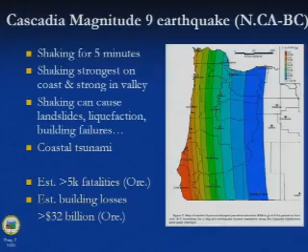So in our study, we estimated that there would be over 5,000 fatalities in Oregon alone. So it doesn't count Washington State and British Columbia and Northern California, and that the amount of losses from building damage would be on the order of over $30 billion.

Now, why are we concerned about weak buildings? Because when weak buildings collapse, it can actually kill a lot of people. In 1994, we had a very important building code change where the building code requires seismic design in the construction of new buildings. Before 1994, the seismic codes were absent, and therefore some of the older buildings in our state are actually dangerous and weak and subject to collapse. So lawmakers in 2001 passed laws that require schools, regardless of the age, and emergency facilities like police stations, hospitals, and fire stations to be seismically life-safe.

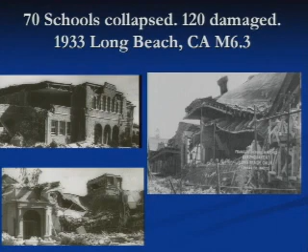Now we passed these important laws based on information from other earthquakes, including from experience in California. In 1933, there was a Long Beach earthquake. That earthquake caused 70 schools to collapse, and there were also over 100 schools that were damaged. So in 1933, actually, California passed laws that say school buildings need to be seismically safe.

So knowing that we have a lot of older buildings, what can we do about them? I'm going to present some information about the seismic risk management program that the Oregon University System has. They have over 1,000 buildings, and they are slowly getting the more important buildings fixed.

We got $5 million of FEMA grants to DOGAMI and worked with the Oregon University System, and we strengthened 5 buildings on 4 of their campuses. These buildings include various construction types, including URMs, or unreinforced masonry buildings, as well as concrete and steel buildings, and they have successfully implemented a risk management program starting in 2005.

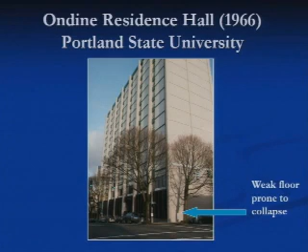So I'm going to show you quickly these buildings. This is a dorm building, a residence hall at Portland State. It was built in 1966, and the first floor is actually a weak floor and prone to collapse. So if your first floor collapses, everything above it is at risk.

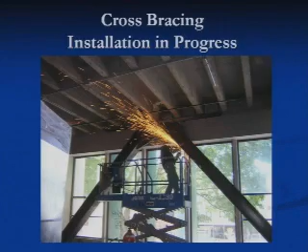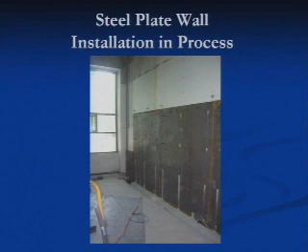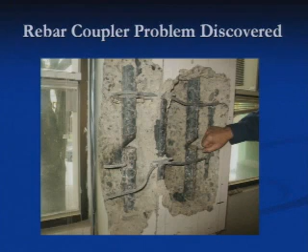We took a look at the rebar. The rebar wasn't welded together, so what we did is we had those welded together, and the building is much better off and won't collapse in a major earthquake.

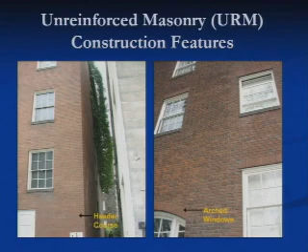This is another building at Portland State. It's an unreinforced masonry building. It has the classic features of an unreinforced masonry building with the arch windows, and also a header course where the bricks are turned sideways. And what we did there is we replaced the roof so the roof was a sound structure, and we tied the walls to the roof so that the walls wouldn't fall out.

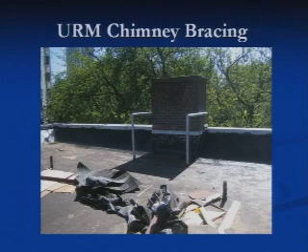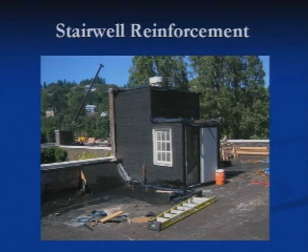We also tied the features on top of the roof. We anchored them down so they wouldn't fall down on the sidewalk and hurt people passing by. So here's the chimney getting braced, as well as the parapet getting braced. We wanted to make sure that the stairwells were solid and there for people to get out of the building, so we strengthened the stairwells as well.

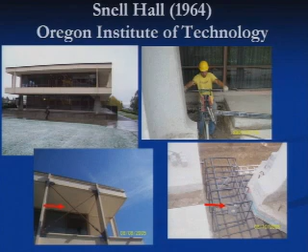Here's a third building. It's a steel building down in Klamath Falls. What we had to do there is actually improve the foundation all the way up to the roof. So you can see the foundation work going on, as well as adding cross-bracing rods up on the second floor.

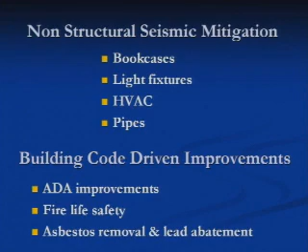And in this case, we also did non-structural seismic mitigation, where we tied the bookcases so that they wouldn't fall down, as well as the light fixtures so the overhead lights don't fall down, as well as securing the heating, ventilation, air conditioning system and piping, and also did a number of code improvements dealing with ADA improvements and fire life safety, asbestos, and lead abatement.

Now, the fourth building we fixed is at Oregon State University. It's what we call a lift slab building, and the floor slabs are not connected well to the columns, and they can actually collapse down pancake style so that there's very little space between the floors, a big life safety concern.

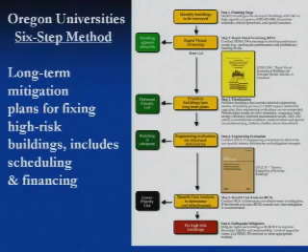So the Oregon University system has a 6-step method where they looked at the major buildings using a rapid visual screening method, prioritized those buildings with respect to other needs that they have, whether it's energy efficiency or deferred maintenance, then did engineering analyses. If it looks like it needs to be fixed, then a cost-benefit analysis before fixing it to make sure that the money is spent very wisely.

They have a lot of buildings and they can't fix everything at once, so they have a long-term mitigation plan for fixing the highest risk buildings, and they integrate the financing and scheduling into that. So it's not possible to fix all of the high-risk buildings at once. It's really a balancing act of looking at the costs and the benefits.

And what we would recommend to all building owners is to approach this with a risk management approach, where you consider these 5 elements of hazard identification, risk assessment, engaging your stakeholders, so whether that's for schools, parents and students and teachers and so forth, together with risk prioritization and risk management.

So to summarize, we know that Oregon has a substantial earthquake risk, and there are ways that we can reduce that risk through earthquake risk management.